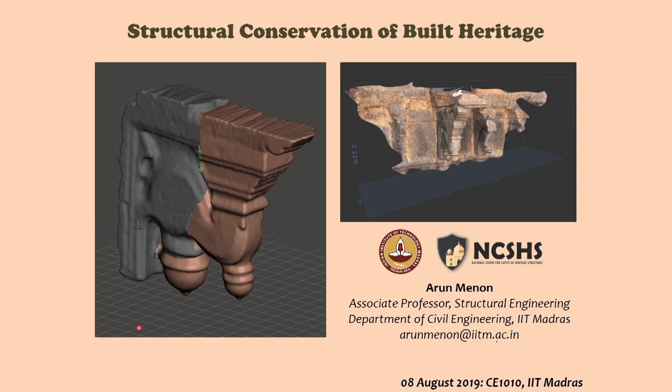I am Arun Menon, a faculty member in structural engineering, besides the building sciences block. I did my bachelor's in architecture, then moved into civil engineering, did my MTech in building technology and construction management, and then my PhD in earthquake engineering, focusing on masonry. That's how this interest in historical masonry structures and monuments came about.

As Professor Gettu was mentioning, that logo next to the IIT logo is the logo of the center we run at the Department of Civil Engineering, referred to as the National Center for Safety of Heritage Structures. We are talking of structural safety. We work on a number of live projects in India and abroad, but we also do a lot of fundamental research in the subject of historical monuments or built heritage in a broader sense.

Today I'll be talking about the subject of structural conservation of built heritage, and how it is a highly interdisciplinary subject where you can connect based on the kind of interest you have in different subjects of arts and science. I'll take you through one example we've recently been working on, which gives you a perspective of how multidisciplinary or interdisciplinary the problem can be, and challenging at times, where engineering comes in, engineering judgment has to be used, and tools available to engineers and researchers would have to be utilized.

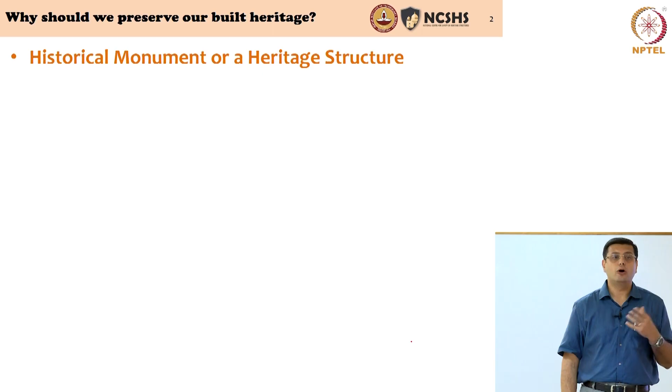We are either talking of monuments, which may be historical monuments or heritage structures. A heritage structure or historical monument is a structure created in the past, some amount of time has passed since it was established and constructed, to commemorate a historical event or a historical person, or which has become important to a community. This community can be local, something important to Chennai, or to IIT. It can be something important to a community, a region, a state, a nation, or the world at large. This has now become part of our history and cultural heritage - that is what defines the built part of cultural heritage itself.

Such an entity starts becoming important from a point of view of symbolism and identity. It tells me about my roots. It is symbolic to me as a physical form that exists in my territory. What are we going to do about this? This was possibly not built when we were born, or even our immediate ancestors were born. Some of these were built 4,000, 5,000 years ago, some maybe a few hundred years ago. So this is from a different period in time - why should we be bothered about protecting them?

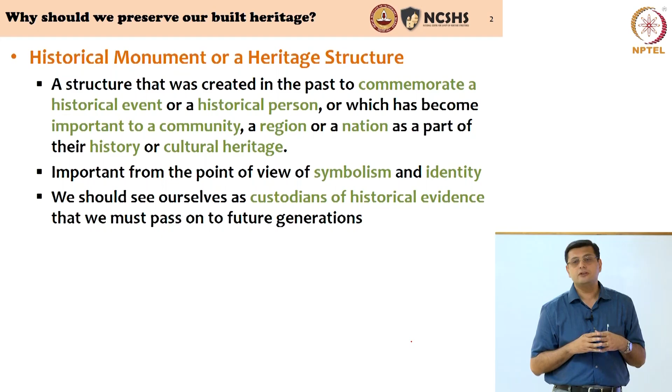We should look at ourselves in the context of historical monuments and heritage structures as mere custodians of historical evidence. This is the physical historical evidence on earth, on territories, of how our ancestors lived and how their history and times unfolded. Our responsibility is only as custodians, to hand it over to the next generation, so that historical evidence is available to them to understand where they come from and what their land means in the context of life on this earth.

Preserving historical monuments or heritage structures does not mean we have to go back to ancient times and live like our ancestors lived. That's not the purpose at all. The purpose is to understand how life evolved and how our ancestors lived. We can draw inspiration from that, look at what is relevant in today's context, apply that, and give new form to that inspiration - that's how we connect the history, the past, to the present and the future.

One important example we've been encountering is sustainability. We think sustainability is a buzzword of the 21st century - wherever you turn, in whichever field of engineering you look at, you hear the term sustainability. Have you heard of the term sustainability?

Yes, it's not a 21st century buzzword. If you actually look at the lifestyle of our ancestors, sustainability was the basic approach to their lifestyles and what they did. These structures are also historical evidence of a certain way of living which is possibly more sustainable, and that is some way we can draw inspiration for in making this earth more sustainable—conducting our activities in a fashion that does not lead to exhaustion of resources meant for everybody.

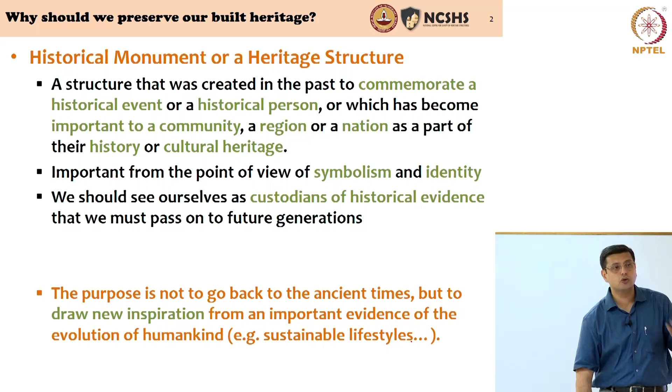So that is the reason why we should protect built heritage as custodians. Our generation is the custodian of this historical evidence, and we merely must preserve it and pass it on to the next generation. So what about the subject of structural conservation?

That's what you saw on the first slide: structural conservation of built heritage. What is structural conservation? Conservation or preservation implies preserving a physical entity. I've used the term structural conservation because here we are referring to the physical entity of buildings, and the structure has to be protected. Only if the structure is protected will the building itself survive, or what it contains survive.

So it's structural conservation that we are talking about, but it's a highly interdisciplinary field in engineering—and not only engineering, it actually has boundaries with many other disciplines. To give you probably not an exhaustive idea, but just to introduce you to the linkages with other subjects, there's a list that I've prepared.

Preservation of built heritage requires collaboration, fundamentally collaboration between the arts and the sciences. You've entered an engineering college, right? You need to engage with the arts and the humanities because there is relevance to everything you do in engineering to human society. That is the reason why we have courses in humanities interlinked throughout your engineering program—because you need to understand the value of what you're doing, and how it comes back to the society, how it comes back to the community.

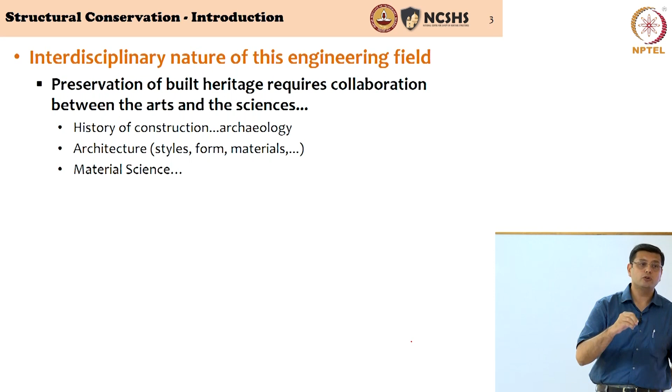You need to learn, you may need to work with people in the area of material science and material engineering, because in civil engineering there's a limit to which we study materials. You might need a material scientist to take you further and understand the composition, the atoms, the way the material itself is formed.

Civil and structural engineering and geotechnical engineering—all disciplines of civil engineering. Electronics and instrumentation: today we are depending heavily on electronics and instrumentation to understand how these structures behave. You can put sensors on these structures, you need to design these sensors and design the data acquisition systems, and have automatic methods and techniques of getting information from these structures and understanding how they behave structurally.

So you need to engage with experts from electronics and instrumentation, or you could have an interdisciplinary field of training and research for yourself—you can be a structural engineer and an electronics and instrumentation expert. Computer science engineering: we are depending so heavily on it because of the programs and algorithms required to gather data from buildings, process large data, the big data we are talking about, look at image processing, and image reconstructions. You need expertise coming in from computer science and engineering.

Botanical sciences—would you ever think botanical sciences would be important in structural conservation? We have several cases where trees are growing on monuments. Have you seen trees growing on monuments? Definitely you would have. In many cases, you have to have some idea of the type of vegetation growing, to be able to either remove it or preserve it. We have dealt with very strange situations where both the monument and the trees had to be preserved.

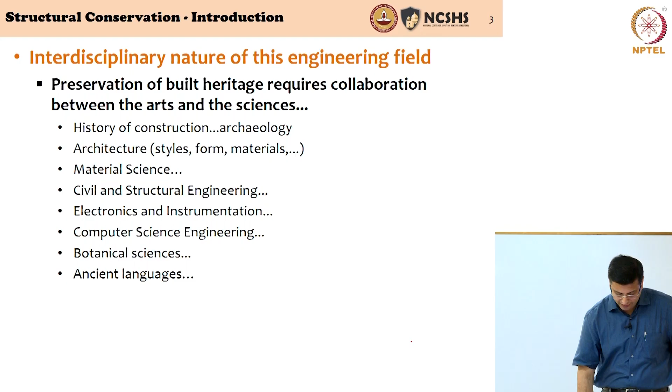Ancient languages - if you're interested in languages, this is a fantastic field, because many of the books written in the past on constructions, on sculpture, on different sciences in the country were in ancient languages. They were written in Sanskrit and other ancient languages across the country. So this is another opportunity for someone interested in languages to connect and do reinterpretation of past history.

Humanities, anthropology, community - because very often these monuments are not sitting in isolation, they're actually sitting in the midst of human populations, and people engage with these monuments in different ways. So an understanding of the community and social values also has to be addressed.

Project management - if you're doing a huge project of conserving a monument, you need someone trained in construction project management, who will be able to sequence and utilize resources - men, material, labor - in a technical skill, in a proper and systematic manner.

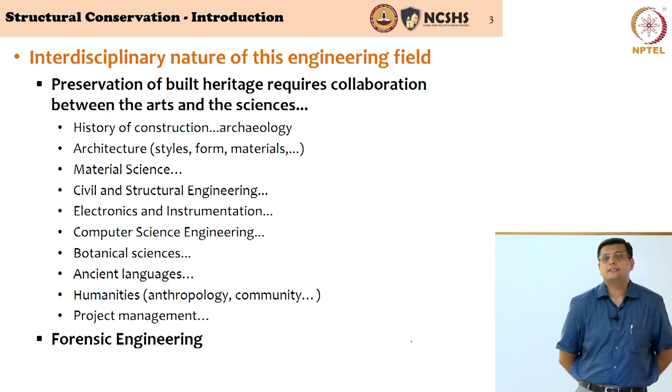Very often, the whole exercise is forensic in nature. Why does forensic come into civil engineering? Very often, the damage you see in these structures, you do not know why it has occurred. You would actually have to play the role of a detective and try to understand the reason for the damage, because unless you know the reason, you will not be able to come up with a remedy in the right manner. So you put on your hat as a building detective, and examine the structure to arrive at answers about the cause of damage before you intervene in such historical constructions.

These historical constructions have been here for hundreds, some for thousands, of years. So you have to respect it - it's been there for several centuries probably before you, and it is with that respect that you must engage with these structures. For that you need as much information as possible from these monuments, and very often we are acting as forensic engineers as far as historical monuments are concerned.

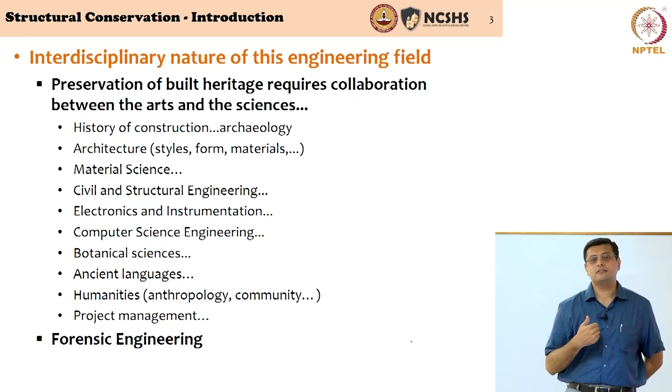Very interesting - I've had a very interesting training over the years. I was interested in medicine, but I didn't make it to the medicine field. I got into architecture and engineering, but today I find myself as a building doctor. I see a lot of parallels - of course the blood and goo is not there, but there's a lot of parallel between what a doctor or surgeon in the medical profession would be doing, to what an engineer would be doing as far as rehabilitation of ancient buildings is concerned.

Having said that, how do you operate within structural conservation? There should be a process, a methodology, a modus operandi of how you operate. And this is where I say it's very similar to how a doctor would operate.

When you're confronted with a problem - let's say your building is damaged - the first stage is referred to as anamnesis. In the anamnesis stage, you're basically asking random questions to anybody who's engaging with the building, to try to make sense of what the problem is and how long it has been there. If you go to a doctor with a headache, the doctor would ask: have you had good sleep in the last few days? Have you had a temperature? What did you eat? These random questions let the doctor structure the problem to get a hold of what is happening. That stage is called the anamnesis stage.

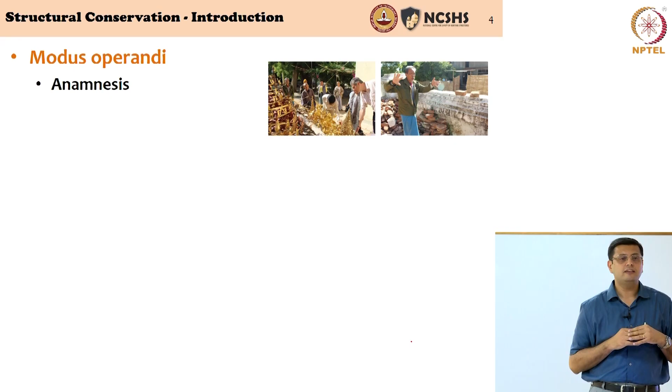The anamnesis stage is a set of questions intended to structure the whole understanding of what is happening. So in a monument, you'd typically ask somebody: how long have you seen this crack in this building? Do you know if something happened that led to this crack appearing? Do you see it increasing every month or every year? These are the kinds of questions in the inquiry stage, called the anamnesis stage.

The second stage is the diagnosis stage. There's a problem with the structure, or there's a problem with your health, and the doctor has to diagnose it. In the diagnosis stage, you're trying to understand the root cause of the problem. The doctor may say, look, I need your blood sample or some other sample from you; this will go to a laboratory, which will interpret the results and tell you if something comes out of it - yes, there's an infection, no, there's no infection. You arrive at conclusions based on actual measurements from the structure.

In the diagnosis stage, tests are required on samples from the structure, or in the structure itself. Blood is taken from your body and taken to a laboratory. If an ECG has to be taken, the instruments are put onto you, right on the body itself. Similarly, you could do tests on a building and make measurements on the building directly.

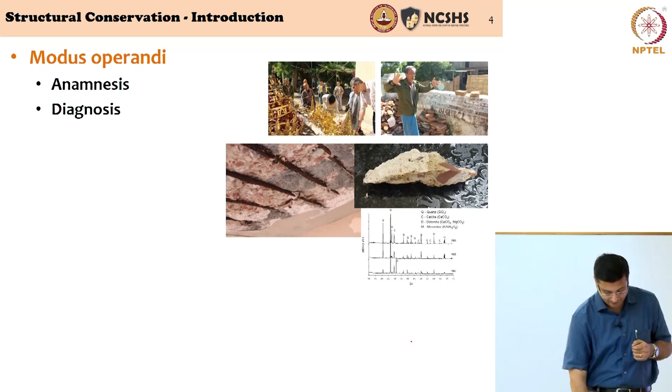Of course, with all this information, there must be a therapy. The doctor may be able to arrive at what should be done to make you feel better, so he or she would prescribe some medicines. Similarly, for a building, you need to do some analysis, and that's where structural engineering, geotechnical engineering, and the courses you will study would actually help you understand what's happening to the structure and what would help it perform better. That's the therapy stage - once therapy is prescribed, the hope is that it actually addresses the problem.

The therapy must address the root cause of the problem. It may or may not. But how do you know if it's actually addressing the original problem? If the doctor gives you a week's prescription for medicines, you go have that and come back, and your headache still persists, or an infection in the blood still persists - there's a problem, because the diagnosis is probably not right, and the therapy is also not right.

So what would the doctor need to do to check if the therapy is working? He or she started with some blood tests; after a week of therapy, the doctor would probably say, take some more tests, or let me look at your symptoms, and arrive at whether it's working or not. So the final stage is actually the control stage, where again it is about taking some materials and testing, or putting sensors and instruments on the structure, checking if it's performing well or if the problem still persists. If there was a wall that was tilting and some repair has been done, and the wall continues to tilt - because you're measuring the tilt - then you have a problem on hand.

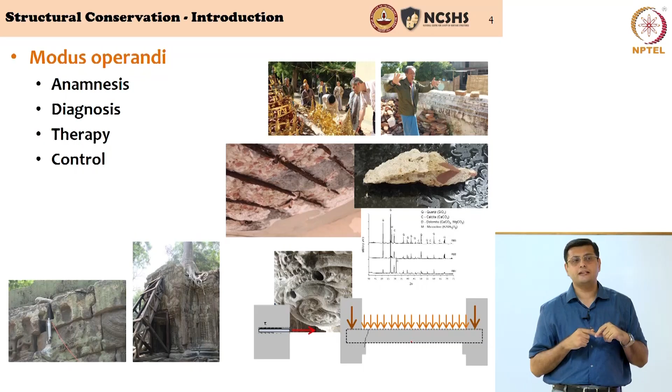And therefore these four stages - anamnesis, diagnosis, therapy and control - are cyclic in nature. After the control stage, if things are not working, something is missing, you have to reformulate your questions and go back to the anamnesis stage. You have missed something, and that's why I said you act as a detective in identifying the problem in order to arrive at a solution. So this is not a linear process, it's a cyclic process. At some point you might stop, because you would have actually cracked the problem and found the right solution.

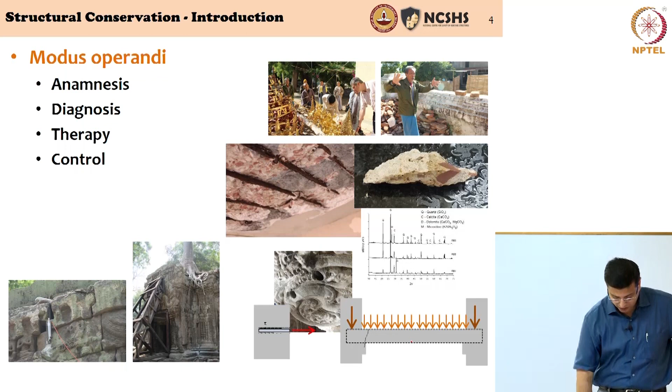A few years ago, we were asked to look at a few problems that the Rashtrapati Bhavan, or the Presidential Palace, has. So very briefly, this was not originally designed as the Rashtrapati Bhavan. It was originally designed for the Governor General of India, designed by Edwin Lutyens as the Viceroy's house.

The designs were conceived at the beginning of the last century, but it was completed in the 1930s. 1915 was when the design was created. You know that in 1911, the capital of India was shifted from Calcutta to New Delhi, and New Delhi was being constructed because that was the capital of the Sone Ki Chidiya, the Indian Empire which the British was holding.

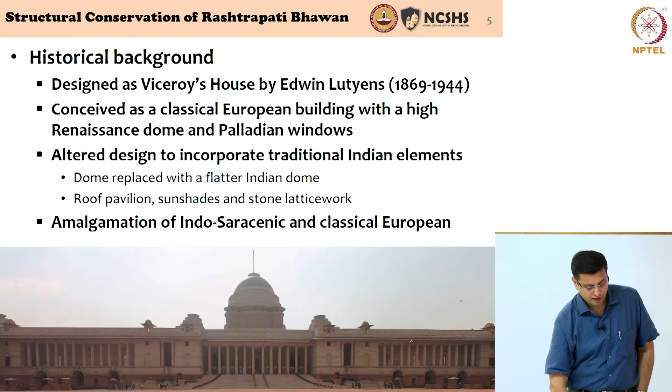This is why IIT was brought in when the comprehensive conservation management plan was being developed a couple of years ago, and we are still engaging with them at Rashtrapati Bhavan. So that's the original drawing.

It was a good thing that from the early 1900s we had Edwin Lutyens' drawings, and these drawings were on cloth, so they would be as large as a room. You spread it out on the floor and have all the details, measured drawings, so we could look at the original designs and then look at what was constructed in the building, and see if there were deviations, and start understanding why the structure developed some damage.

So the fundamental problem was the crack in the dome that we were looking at, and you've heard the name, the Durbar Hall. You must have seen news reports about the Durbar Hall, or functions happening there when the Padma Awards or the Bharat Ratna are presented.

These functions are held in the Durbar Hall. The Durbar Hall was meant to be the Viceroy's main room where he interacts with guests, but today it is the place where official functions of the government are held, including the distribution of the Padma Awards. So what we are really trying to look at is actually the dome that is sitting there.

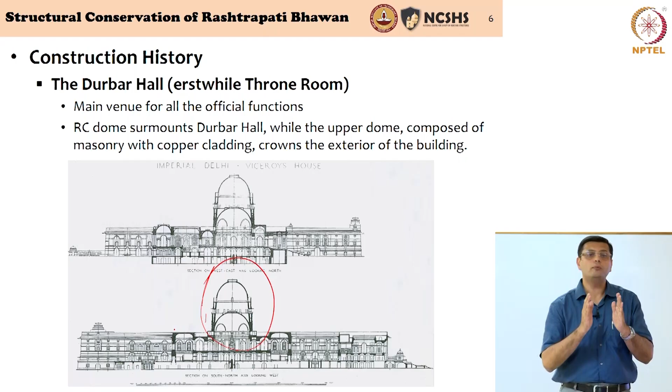The dome is right on top of the Durbar Hall, and this dome is the one which has some distress. That's a picture of the Durbar Hall.

You can see how the dome rises up. The problem was, can you see these two niches? That's like a cutout in the dome. In fact, there are 4 such cutouts. You can see here, 1, 2, 3, and 4.

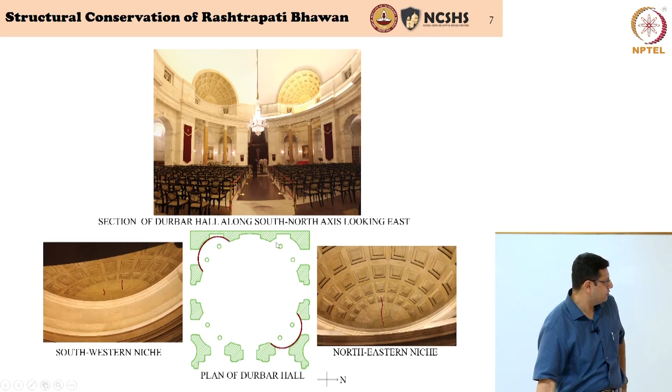On the northeastern and southwestern corners, where I have highlighted them in red, those 2 niches in the dome had cracks. One of the niches has a significant crack, you can see the red line here superposed on this picture, and on the other side there are 2 smaller cracks. So diametrically opposite, the northeastern and southwestern niches had cracks.

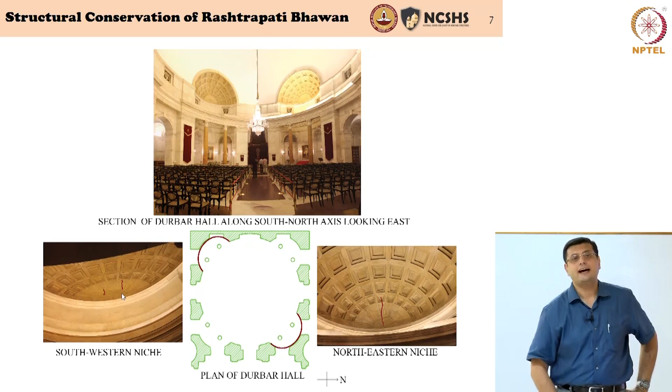The fundamental problem is, domes are constructions which, merely because of their shape, would tend to open outwards under their dead weight. You take a rubber ball, slice it into 2, take one hemisphere, place it on the ground and exert some pressure, the tendency of this hemisphere will be to open outwards. Particularly the lower portions would try to open outwards, which means it would introduce what we refer to as circumferential tension, and that's a characteristic of a dome.

Now, if you construct this in a material which has tensile resisting elements, which is a tensile resisting element in construction materials? What can resist tension? Any material that can resist tension? What's tension? I stretch and it doesn't fail. Concrete is not a tensile resisting material.

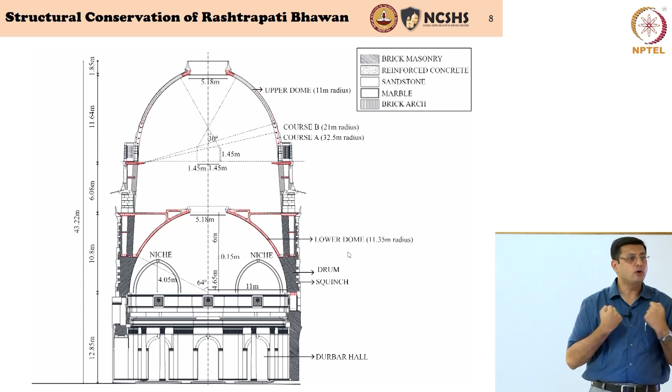So what is fundamental is, when these domes tend to open outwards, they try to crack the dome. If you have tensile resisting material there, if you have steel there, it will actually prevent the dome from cracking. But if you do not have steel there, then the chances are the dome will crack.

So very interestingly, when we examined the whole cross section, we realized that while the upper dome was built of brick and steel - the red dots you see are steel cables running inside - and then if you come down, this red part is built in reinforced concrete. So again, a part of the dome is built in reinforced concrete. There is reinforcement, and hence it can resist and counteract the tension expected.

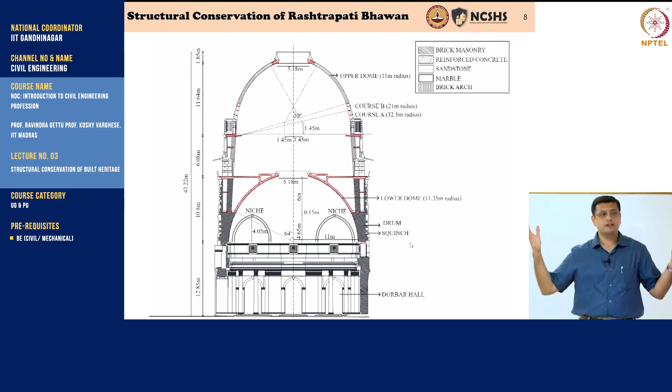But this black hatching that you see, the lower part of the main dome, exactly where the niche is coming, was pure brick masonry with no steel reinforcement. As I said, Edwin Lutyens and all his team of engineers and architects were looking at an experimental structure. This size of an Indo-Saracenic building was not built in India before. So they were playing around with materials and forms, and here you can actually see different materials being used in the same structure. That was possibly an experimentation which went slightly wrong.

So this part, which is a critical part of the dome, if you look at this as a hemisphere, you can see that the lower part of the hemisphere may open outwards and can develop cracks due to tension, and unfortunately in that location there was no steel.

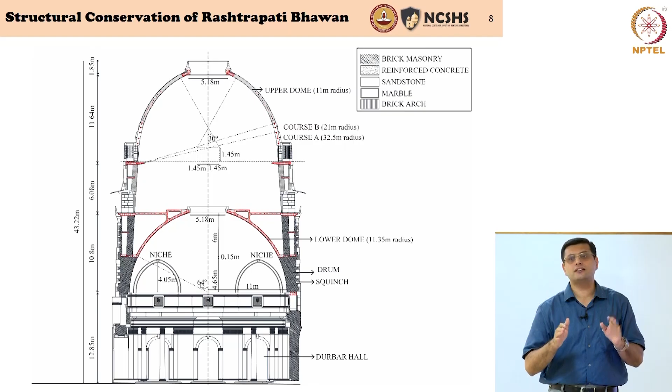So this was one fundamental problem. But keep your eyes on these niches, and I'll tell you more about them. We looked at the original drawings of Sir Edwin Lutyens, which we were lucky to have, and compared them to the actual structure. This gave us another clue that might lead us to why the cracks happened on the northeastern corner, and also showed up on the southwestern corner.

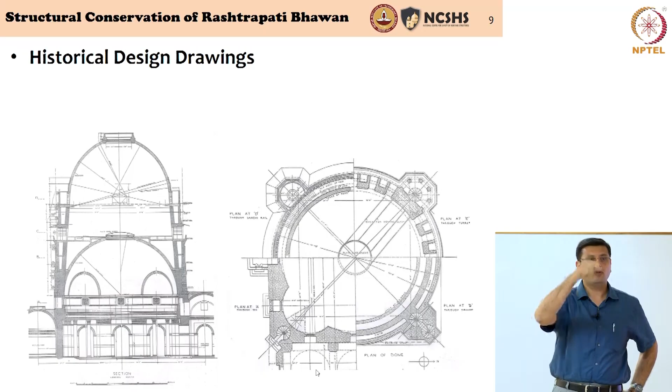This is the reason history of construction is very important in this subject. When we looked at the original drawing, in the 4 corners of the dome, Edwin Lutyens had intended 4 spiral staircases. But when construction was completed, only 1 spiral or helicoidal staircase was built, while the other 3 locations did not have these spiral staircases.

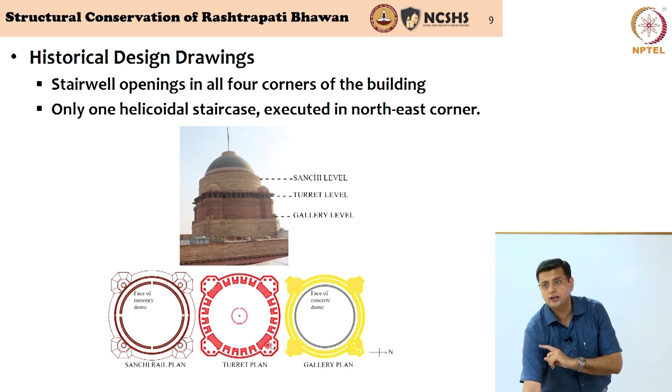So while executing, they deviated from the original plan, meaning a certain symmetry in the original design was lost. We found a staircase opening only on the northeastern corner, whereas it was solid construction on the other 3 corners. So we had to understand in more detail why this was cracking.

It's a complex structure, so while we do some basic hand calculations, we also depend on complex computer based simulation to understand the behavior of the structure more rigorously. We developed the central portion of the structure as an isolated computer model, a structural model on which you can run analysis - applying gravity loads, lateral forces, earthquakes, and so on. This is called finite element modeling or finite element analysis.

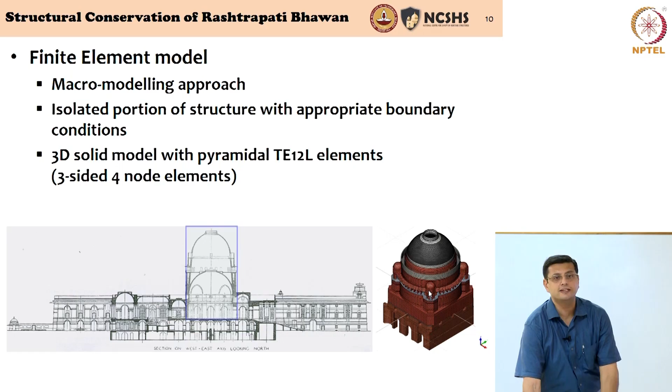So we carried out some gravity load analysis, dead weight analysis, and then we carried out earthquake analysis as well - what would happen to the structure if there was an earthquake.

But what was very interesting was, you saw the niches, right? Those 4 niches were carved out from the resisting material of the dome at locations where steel reinforcement was not provided. So material was very important there, that cross section was essential, but niches were carved out in that important cross section. About 60% of the wall thickness was reduced in those 4 corners because of the presence of the niche - that was one issue.

The second problem was that in the northeastern corner, it was further weakened by a stairwell or staircase opening, and the gravity load analysis clearly showed us - you can see these light shades changing here, a light color coming in inside the niches - that's clearly the indication of tension crack formation. So even under gravity load alone, because of the niche design and the absence of tensile resisting elements, combined with the stairwell present only in the northeastern corner, the crack had actually formed.

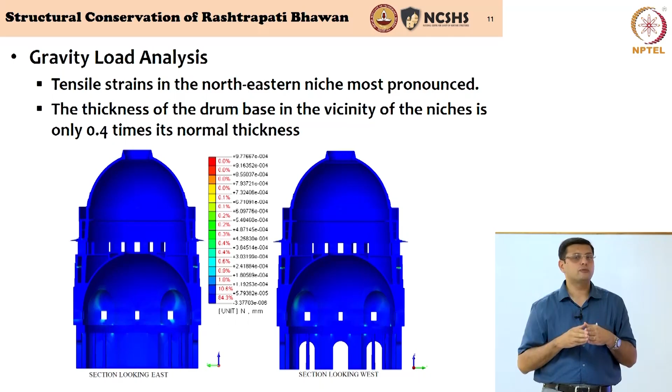This took us a few cycles to arrive at. Iteratively we reached this point, but it was almost forensic, because we had to chase this issue and figure out what was happening in the structure. This is a section of the plan, a cut section of the finite element model. We looked at the role this stairwell opening was playing, and it showed us that its presence was what was creating these tension cracks.

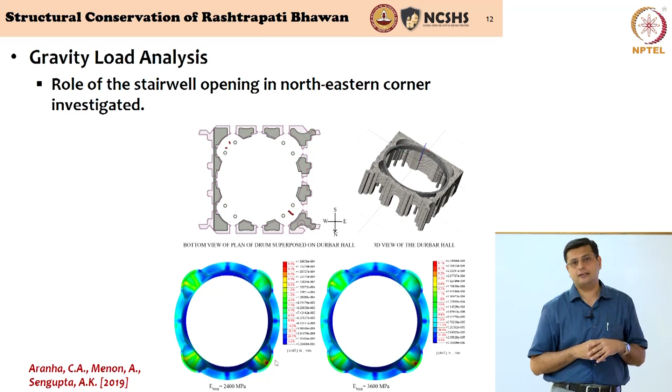Now having understood what the problem is, we can comfortably work on a solution, because we didn't want to work on a solution without knowing what was happening—then you may be completely going wrong. So this was the first aspect. In the Moodle site there's a paper related to this; no need to read it, the slides are self-explanatory, but if you're interested in what was conducted, it's a little complex and you could read the paper for a better understanding.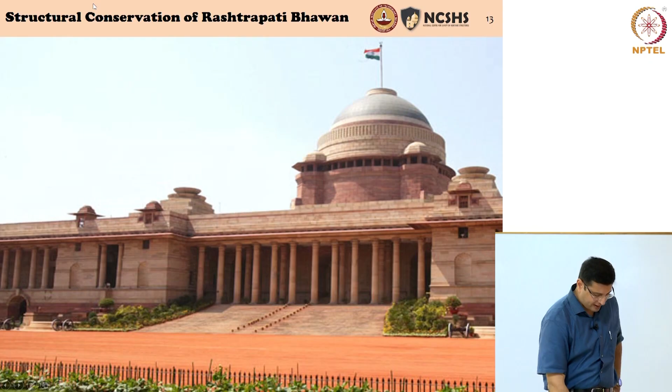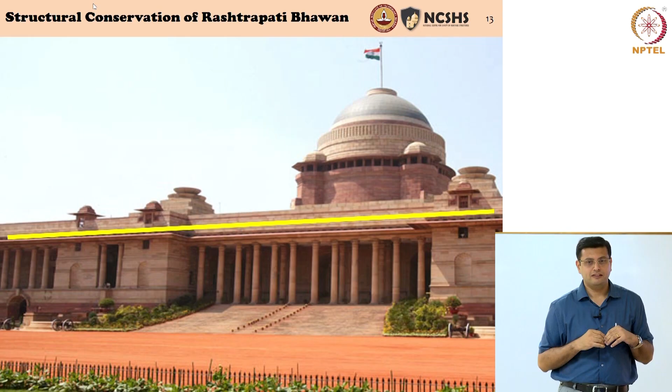The second thing, which was a more critical problem, was falling material from the sunshades—again at Rashtrapati Bhavan, those sunshades which wrap around the entire building. Can you guess the length of sunshades in this building? 1.2 kilometers. It's a huge building, and we had to deal with 1.2 kilometers of sunshades.

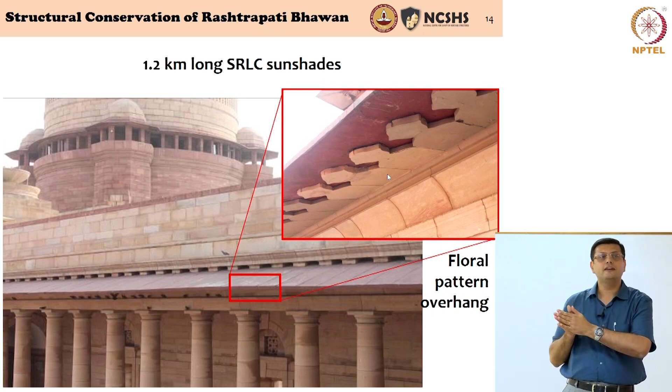And we had original drawings, so we went back to them, but in the original drawings we saw somebody had made a correction. As per Lutyens' design, Edwin Lutyens' original design, these were meant to be chhajjas like in Rajasthani architecture—large cornices and sunshades made out of sandstone present in big buildings in Rajasthan, western India. These people had drawn inspiration from ancient Indian architecture, so they wanted to bring this feature, and the idea of Edwin Lutyens was to have these massive sandstone, natural material sunshades.

But in 1933, when they started construction, they were given a very short deadline. They said 1915 we started making these drawings, by 1933 the building is not built—they had to finish in a very short period of time. They could not wait to get so much sandstone, and since there was a shortage, they ended up making these sunshades in concrete. And when made in concrete, since a cantilever is expected to develop tension at the top surface—it will sag, it will hog, and therefore tension at the top—you needed tensile resisting material.

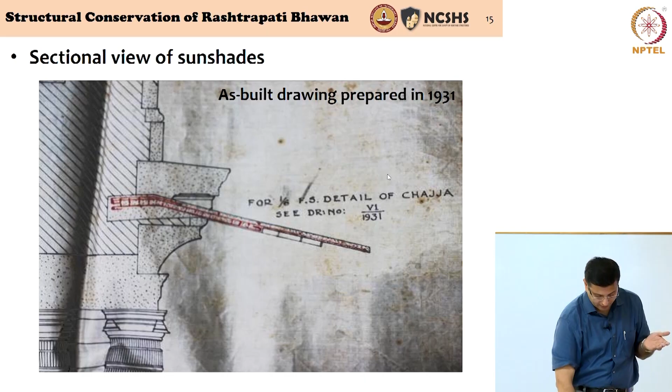But the problem is, today, that is the status of the sunshades. They are at a height of about 50 feet, and you have material that falls as you're walking in and out of the building. You can imagine if a piece of lime concrete from a height of 50 feet were to hit anybody's head, you could actually have a fatal situation.

So this is a problem in reinforced structures. You need someone who has an idea of material science, of electrochemical processes, who's working on material characterization and material repair to come and help us. And that's what we actually did.

We worked closely with our building technology group, where we have corrosion scientists and people working on material repair, and we had to start understanding why this was corroding so much. The fact was—and you will appreciate this probably a little later in a civil engineering program—when you have steel embedded within concrete, concrete protects steel. It does not allow moisture and air to diffuse and start the corrosion process, which is an electrochemical process in the steel.

Unfortunately, in this construction, cement concrete as we know it today was not used, but lime concrete was used, because lime was what was abundantly available then. Today lime is not abundantly available, only cement is. Lime concrete does not act as a good protector of steel—it is highly porous, allowing moisture and air to pass into it, not acting as a layer that protects steel, and that is the reason why 80 years down the line, almost all the steel has corroded.

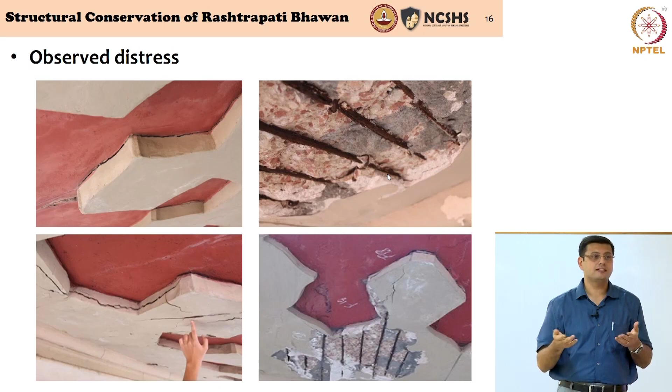So we actually had to understand if these sunshades could fail if load was placed on it. So we had to do a test, and we were fortunate because they allowed us to do a test on some of the sunshades. We tried to take it to collapse, or try to take it to failure.

So again, some investigations had to be carried out. We had to understand how much corrosion is happening, and because of corrosion in the steel, there was damage to the material, and that had to be assessed.

We then had to understand it's 1.2 kilometers of sunshades. We could do a test in one location, but it may not be representative of another location. So we had to do a good coverage of the 1.2 kilometers to have a good idea of what was happening. And finally, we also had to do a load test on some of the sunshades to understand if the sunshades could fail in this sort of situation.

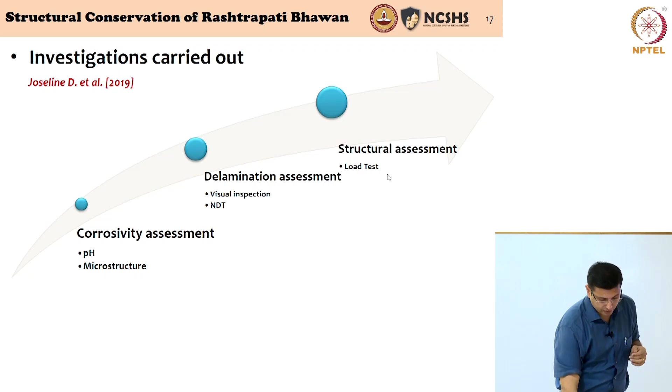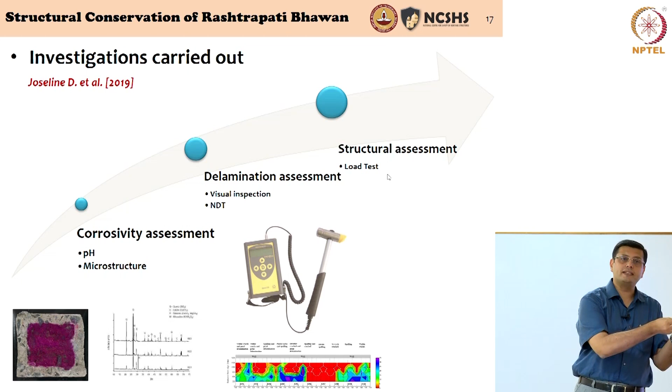So we did some laboratory tests to understand what was happening in the material. We had to do some non-destructive tests. We did some tests on materials taken from the structure, took it to a laboratory and did some tests.

But to get a better coverage of the 1.2 kilometers of sunshades, over 8 days, our team of researchers physically covered almost 30% of the 1.2 kilometers of sunshades, which is a good representative proportion of the actual structure.

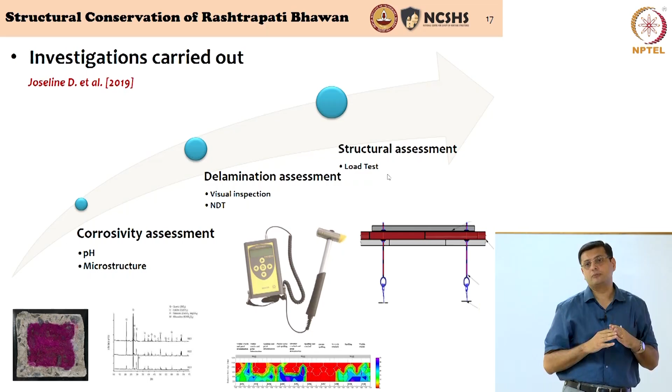And finally, we did the load test. We actually put some cables and tried to make the sunshade fail, and when it did not fail at load levels that we calculated, we were comfortable that you do not have a collapse of the sunshade.

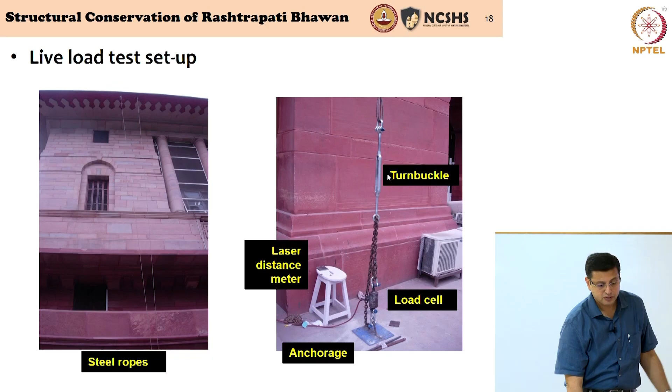So this is just a picture of the load test. We were pulling the sunshades down to simulate the weight of people standing on it and working to put the lights and take them off later. So you can see our team there on top of Rashtrapati Bhavan sunshades.

We got there with fire trucks. You have this massive Volvo truck which has a portion that can take you all the way up, put you there. So this fire truck would come along with us, and we were on the sunshades or beneath the sunshades doing all the tests.

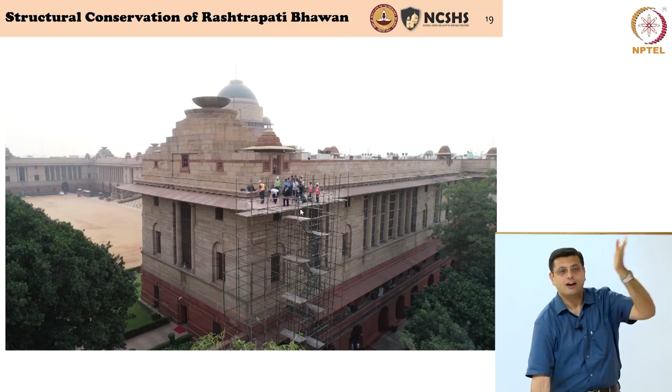And that's a picture taken by a drone of the work that was happening.

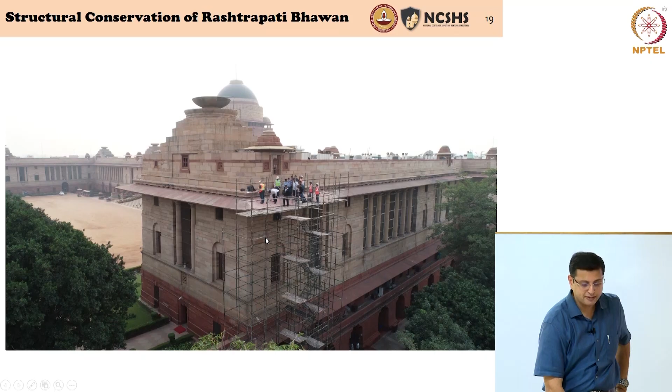Finally, in the last few months, we have actually come out with a repair methodology, and this repair methodology is being implemented. We have already implemented it on 10 meters of the sunshade, and we are now checking, because control is important, we are now checking if it is working, and we have 6 months of monitoring data.

You see these cables in different locations, information on current in the electrochemical process of corrosion is being measured, and it has now given us confidence that the technique we have applied seems to be working, and now a tender has been opened for the entire 1.2 kilometers of sunshades to be repaired.

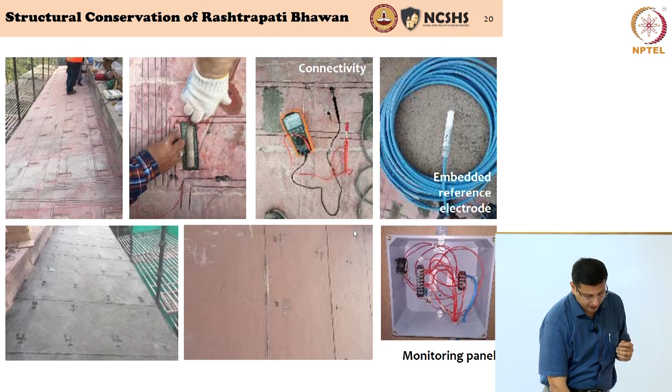So this is really the whole project that we have been involved in. I was talking to you about the need for image reconstruction in heritage conservation, working with computer science engineers. This is in Maharashtra, in Raigad Fort, where we are working to reconstruct some broken parts of Shivaji's fort, and we have used very simple tools, but numerical and quantitative, to be able to reconstruct broken parts of a structure, and this again requires interdisciplinary collaboration.

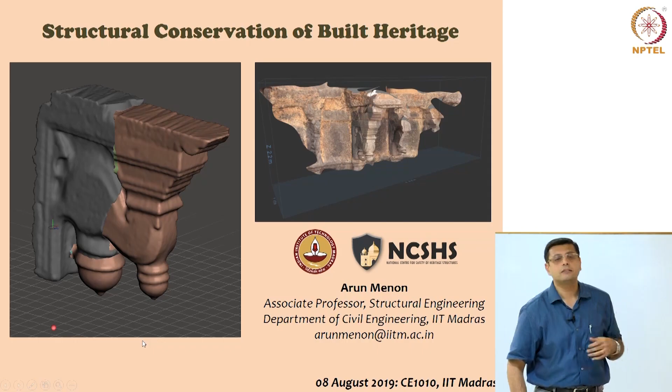So with that, the idea was to tell you how interdisciplinary this subject is. It requires you to work as a forensic engineer, you have to look at repairing these structures or protecting these structures, and those of you who are interested can come and speak to us. We have a big group, and it will be interesting to collaborate. I'll stop here.